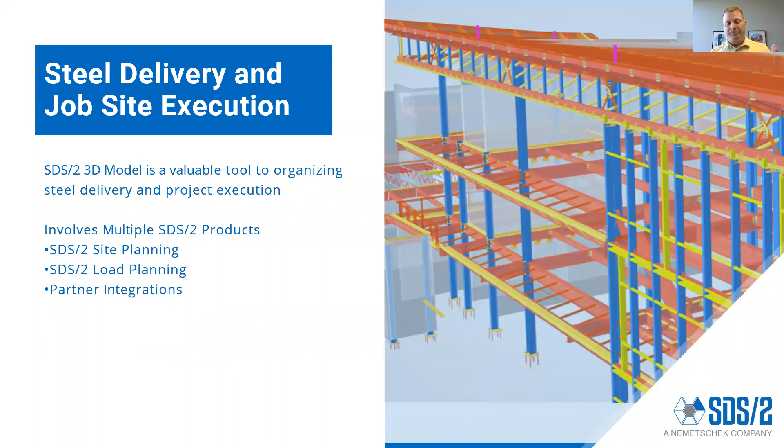So one of the things we thought about was the steel delivery and job site execution. So we've got this model with all this information in it. How can we get that out and how can we make it easy for erectors to take advantage of? So we're going to cover today our SDS2 3D model and the available tools that go along with it, our site planning, our load planning, and some partner integration. Some other people in the industry do things better than we do, but we tie in with them because they've got their niche and they do a very good job at it. So we'll get to cover a handful of those, again focusing on steel delivery and job site execution.

We're also going to get into the benefits of the 3D model, how companies are already using SDS2 site planning to streamline their process, how to use the 3D model data for bid and early planning, how the model can be used before shipping to site, and again, like I said, our partner integrations.

So why should you care about a 3D model? Well, schedules aren't getting increased, drawings aren't getting better, and the lack of experience, whether it's a new person on the project or a new person to the company, there's always that chance that you might have someone looking over something who doesn't have the experience that you're hoping to have.

You also have multiple sources of information. Do you have the most current drawings? I mean, how many times have you been out in the field and you're looking through something and you're working off drawings that were issued 2 months ago and there's already been 3 or 4 different new issues made, but you just don't have them there. So the model can take care of that. It is the source of truth.

The fabricator's model contains the most accurate and up-to-date information, and the ability to take advantage of that can help you out downstream. The reason why it's the most accurate is because all the CNC data that goes through those fancy machines in the shop are coming from a 3D model. Your bolts, your quantities, weights and center of mass. Softwares like ours, we have that all in the model. We know the weight per foot, we know the K distance, we get down right to that 1/16 of an inch, so we can supply that information to those fancy CNC machines that do great jobs.

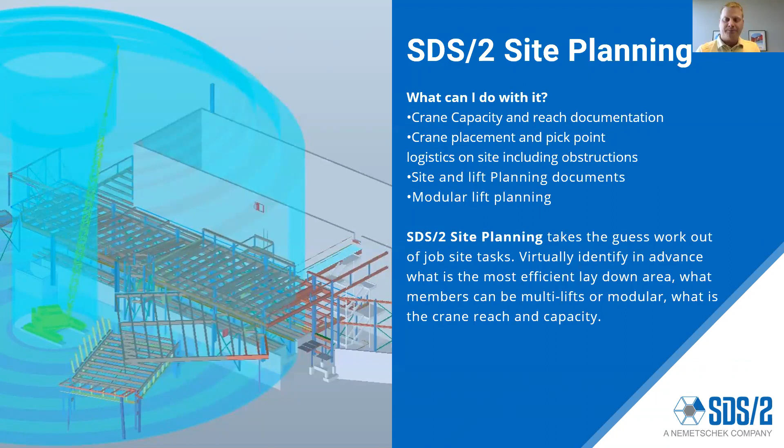This is from the Boldt company, and this is going to be based off a couple projects they did. The Consumers Energy Project was one of them. They teamed up with Merrill Iron and Steel, who fabricated the steel for this project. So it was, again, a fabricator working with an erector in this case. What they did is they didn't even worry about the cranes when they were using our SDS2 erector station. They used it to create pre-assembly erection lists for pulling the steel from the laydown area. They created the erector sequencing and the work packages, and they reported all the status tracking, all the daily stuff back. So they weren't worried about cranes.

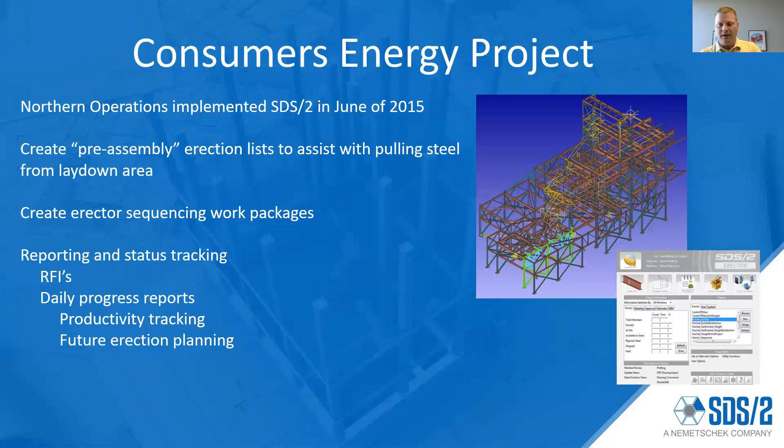They wanted to sit in a meeting before anybody showed up on site and figure out, where do we put the steel down, who's going to work on what, and where is everything when we show up, how does it need to go together. And they were able to do this by taking the fabrication model from Merrill and sit down and have meetings before anyone was even out on site.

They're able to look at parts of the model, like all these pieces here to the left, and figure out, hey, we can either shop assemble these and ship them, or we can assemble them in the field and do a single lift. So it gave them that flexibility to jump in and take a look at some of those time-saving efforts there well before they would have been able to, or there's really no way to do that before having the access to the fabricator's 3D model.

What it's going to create. This was what they called their erector for their work packages. They were able to get an Excel list of members to be erected, marks, weights, piece, all that was included. The bolt list, a 3D PDF for field use as well. So you can send that to a tablet, you could spin it around, everyone could take a look at it, and you can answer questions that way.

Again, the benefits of using the fabricator's model. Unlimited benefits they've only begun to see was a nice one. We always like to hear that. They're able to provide the slideshows of the steel erection by sequence. Anytime there was a question, they didn't have to go back to the fabricator. It could be answered right there in the field as well.

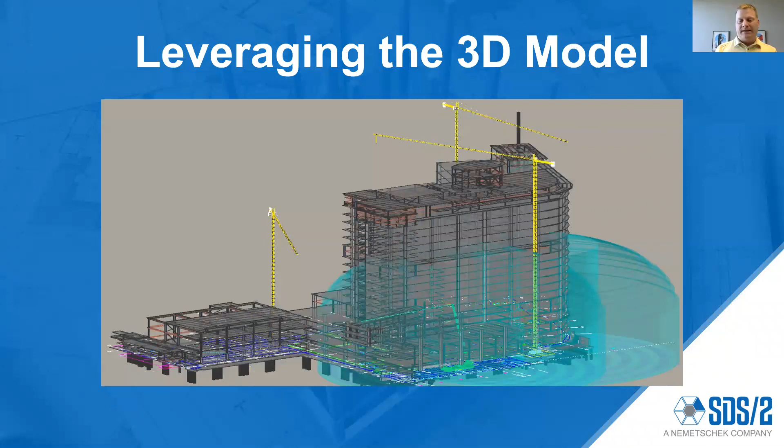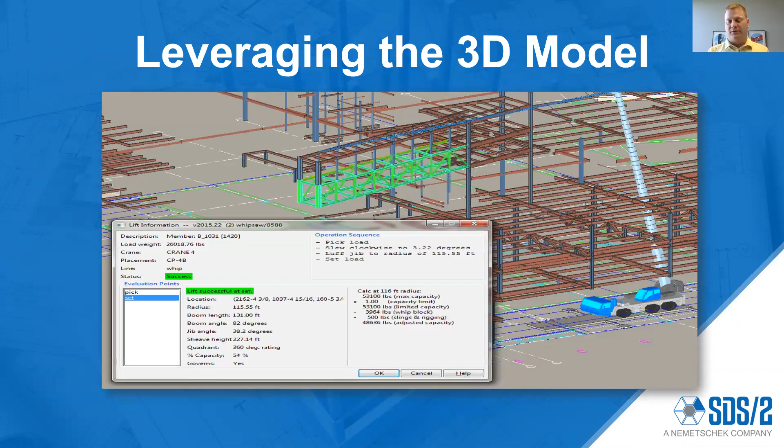They're able to prove that we needed that extra truck crane there for this walkway. And you can see some of the information that they were able to pull with the SDS2 erector station to figure out capacities, if it's good at the set or the pick point and so forth. And they were able to show them, hey, you're going to need this other crane out here. And they actually won the job with their extreme knowledge of the project. And then they were able to take that on and move forward and fabricate it and erect it.

Next thing I want to talk about is from the fab shop to the field. So the next thing we have is our SDS2 load planning. We get down to CNC machines and all this 3D modeling stuff, but when it comes to getting stuff on a truck, there's just a way to do it. Sometimes it's, hey, what's out here? Let's try to get the most weight on there. Let's just get this sequence out.

We wanted to create a way where you can basically play Tetris with this. So you can take your steel that's fabricated, you can configure it on many different trailers, you can specify what kind of trailer you have, and it will do center of gravity checks, things like that. But it also gives you a visual plan on how to load the truck. Now, as erectors, you guys aren't loading trucks, but you're unloading trucks. So the better that load can show up on site, I think it can save you some time, and I've got some examples of that in a little bit. But this is our load planning software. It's fairly new, been around for about 2 years. And a lot of fabricators are really diving into this.

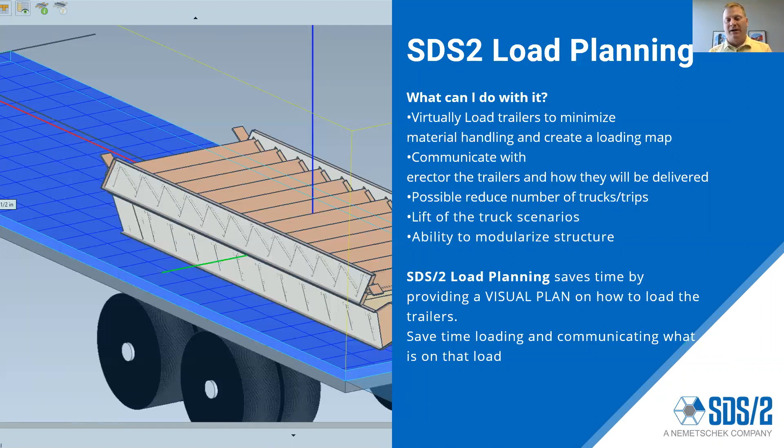It imports any IFC model, so you can bring it in from any software that creates an IFC file. And then you can see some screenshots here of how the truckload looks in our software. And then we can also create an IFC out of that to pass along to anybody that's got a tablet. You can see on a tablet exactly what it's going to look like.

It's not just about saving truckloads. It's about being safe. It's about getting all that stuff in and out where it's safe for the fabricator loading it, and it's safe for the erector unloading it. And then also, if you're erecting off the back of a truck, we can go ahead and stack these, and it just gives you that.

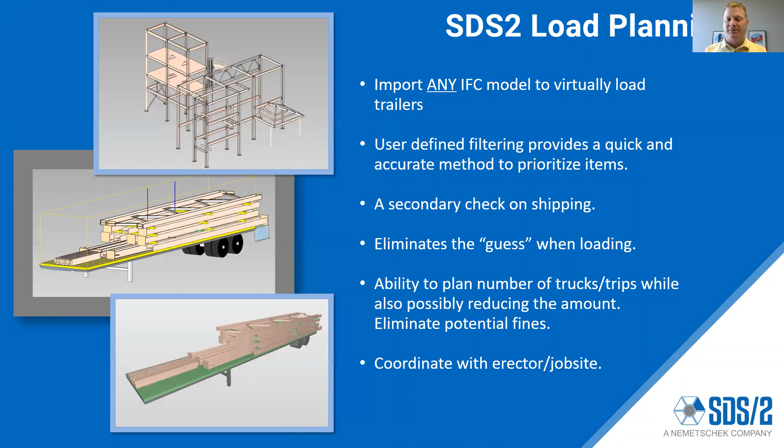It's going to be a lot quicker than having to do it the old way of going through and trying to figure out on a detail sheet what piece marks need to go where. You can actually see it here. You visibly see what it's going to look like when it rolls out the door. So that gets to what we were just talking about there, reducing the material handling in the field, giving your partners the best chance for success.

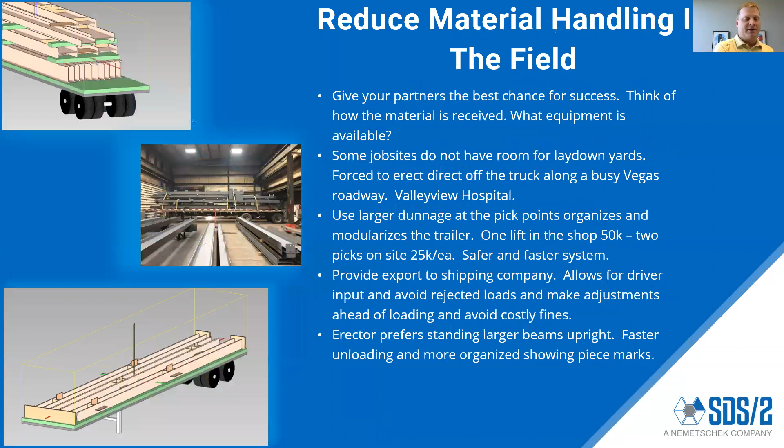If anyone's worked on a side plate job or anything like that, you've got things hanging off. It's not as easy as just loading sticks on a truck. So they were able to go through and visually create these. Then the members came out of the fab and processing. Then they sorted by erection sequence, then by load number. So you can track it down to that level.

So with those large jobs that have multiple contractors and require a great deal of coordination, this is a great way for those fabricators to build it up and get those loads out to you so you're good to go. This gets into the color code laning, staging loads using skids. If they've got a heavier load, they're going to have maybe a higher capacity crane in the fab shop to load the truck than you guys have out on site.

They can stagger it that way. So they can actually go in and see, okay, let's just do 25K here. Then we'll double the tonnage, throw another 25K on top of it. That way those guys can take it off just as easy. They don't have to worry about breaking it apart out there in the field.

So that leads me to the last part here, partner integrations. Who else do we work with? Erection Bid Wizard. I think everyone that's ever been to Impact has hopefully met Vince. He's got a great product, great guy. This is something that you can take an SDS2 model out of and feed into his product. And it will give you all the erection costs and things like that.